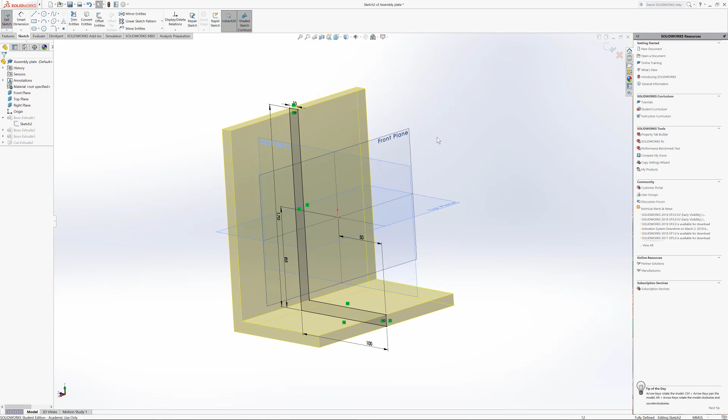So as you can see, we already loaded into SolidWorks. Just to give an idea of my sketch, I made this L shape and extruded it. So it's 10, that length, that's 100, that's 170, and then it sits halfway to the origin, 85, and the same with the other side, 50. That's just to give an idea of how the plate I'm using was drawn.

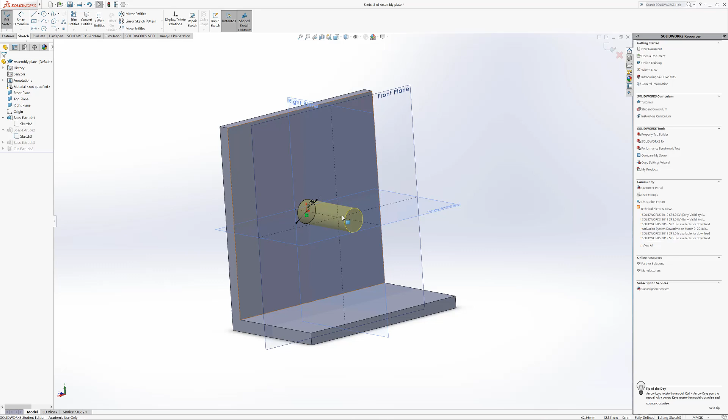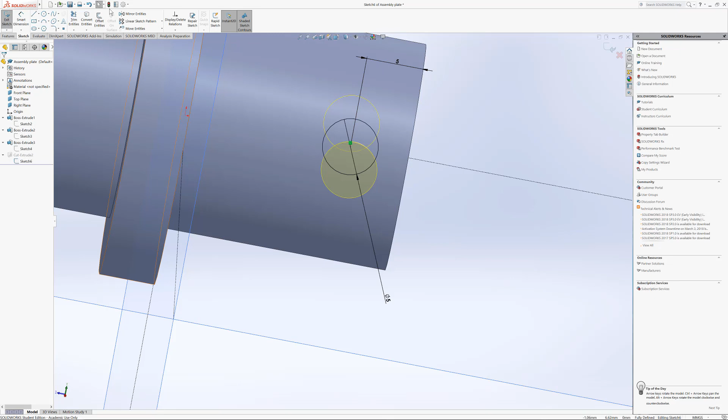I'll also show you this. If you want to try it, this one is just 20 and then extrusion back. These are pre-drawn, my plate. Same with this one, it's just a 30 diameter and then extrusion back. You can pause the screen as I go on. And then this one is 5 diameter and then 5 from the edge. So basically, that's the plate I've drawn.

You can pause on each individual section and create the plate yourself. I just want to give you an idea of how to do assembly.

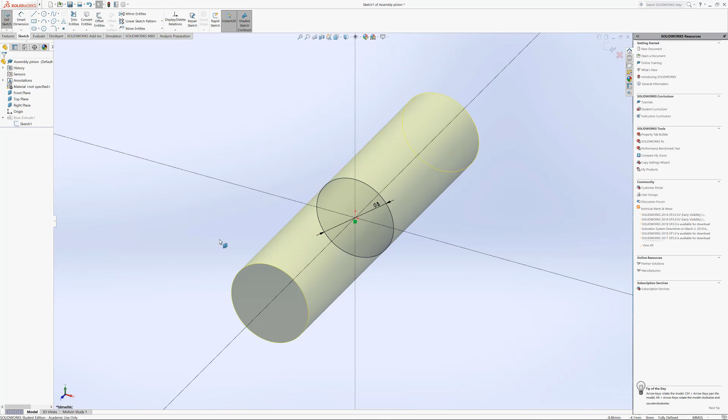I also have a different component, a pinion that fits into that small little hole. Basically my pinion, just to give an idea, it's a 5 diameter hole and I extruded it. Not sure, I think I extruded it 21 millimeters.

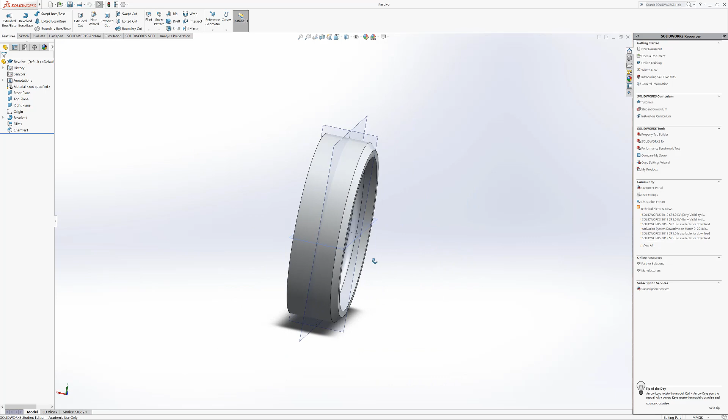And then the revolve looks like a wheel almost. This one you know from my previous tutorial, I've shown you step by step how to do a revolve and how to draw this one. So just go back to the video that says revolve.

So basically to start off an assembly, you click here on top saying new, go to assembly, click on assembly, and say okay.

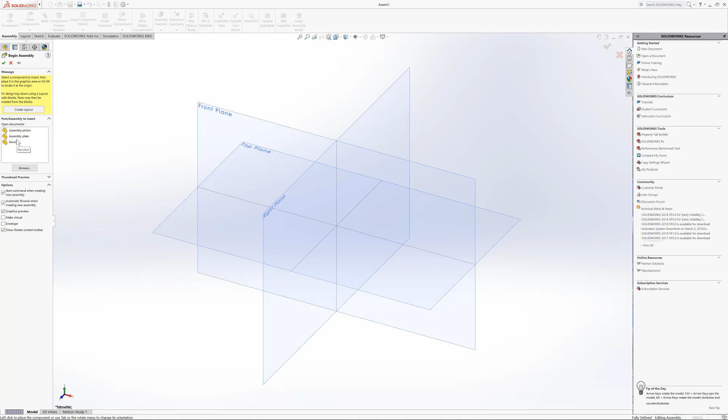Obviously now there's no need to view your planes as yet, but you can just view your planes. And as you can see, because all the other drawings are open, it automatically puts them here under open documents. Depending on if you don't want to use certain ones, you can close them and they'll disappear here, or you can open ones and they'll be added here.

Basically, let's just insert a component, the plate. There's my plate. Your plate initially might look something like this, so you just rotate it to make sure you can see everything and place it there.

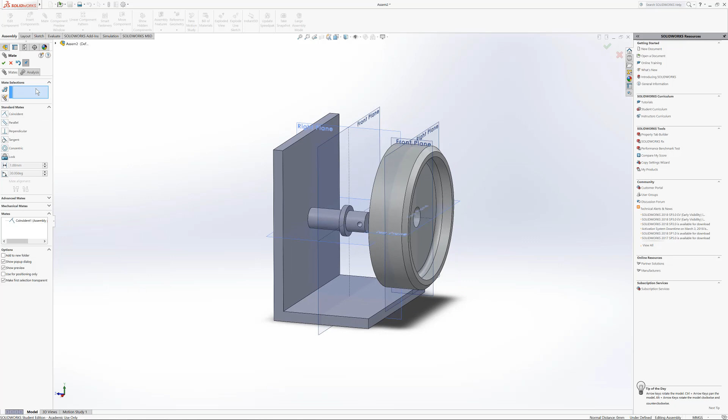Now I start inserting my other plates, or my other components. So let's insert another component, now we want to insert the revolve we made. You can't rotate now because it's going to rotate the whole screen, so for the revolve just place it anywhere. Please don't place it on the plate, it just makes it much more difficult to see what you're mating with what. Let's view our planes.

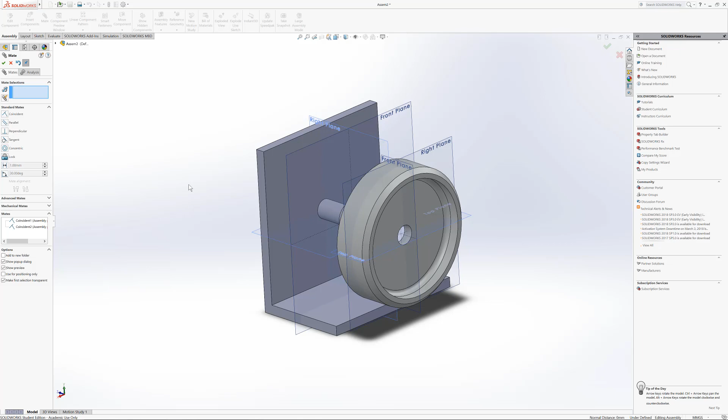This just makes it easier, because like I said, I use my planes as mating functions. So let's take this plane here, we go here on top and say mate, to position two components relative to one another. Let's say we want to mate the front plane to the right plane. Can you see what it does? It automatically snaps it into position.

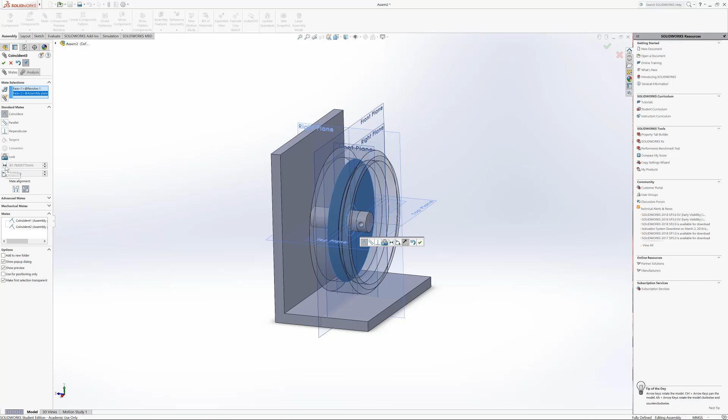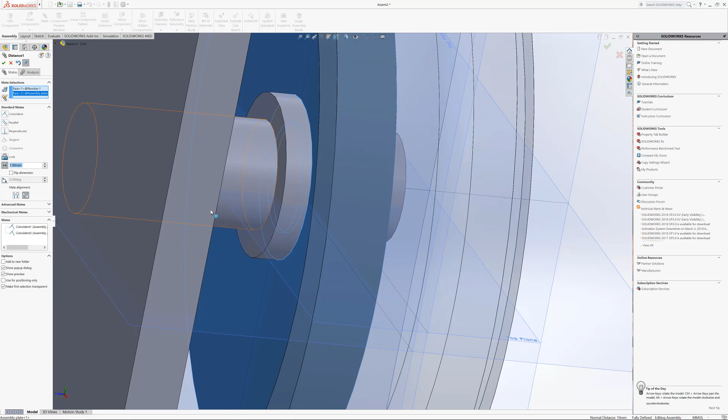And then we just say yes, I want to do it that way, and make sure this edge is on the outer side. So let's add another mating function. Now we say, let's mate that plane, the top plane, with this top plane, so it's on the same height since it's going in there. We say yes, and obviously most of the time in assembly, it needs 3 mate selections before it sits exactly where you want.

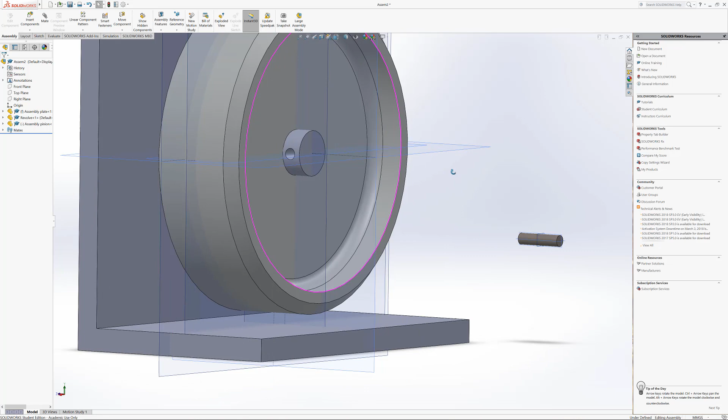So most of the time would be 3. Some applications, which is very rare, would be 2. Okay, and obviously now we want to let this hole sit in there. So what we can do is I can select now this surface here at the back, and I can say it needs to sit there, and then you can see it snaps to it.

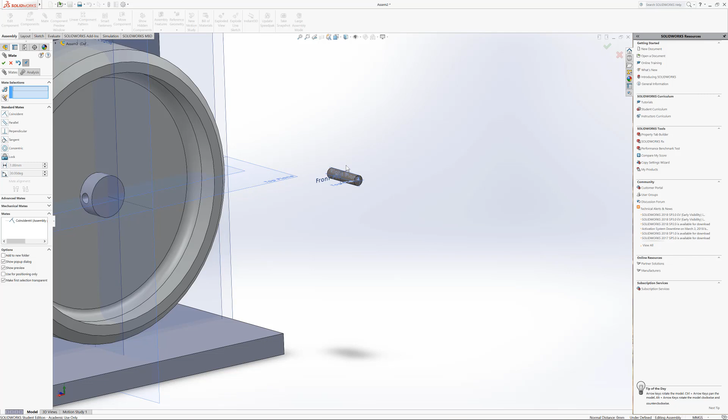But now what I can do is I can say I want it to sit at a certain distance. So I just go here, say a certain distance. Let's make it sit 1. Okay, let's just first give an idea what it does. Let's say 10. So as you can see now, this surface to this blue surface is 10 millimeters apart, that section. So if we change this to maybe 1, you see it comes closer to this component. Okay, so let's just leave it at 1. We just say yes, okay.

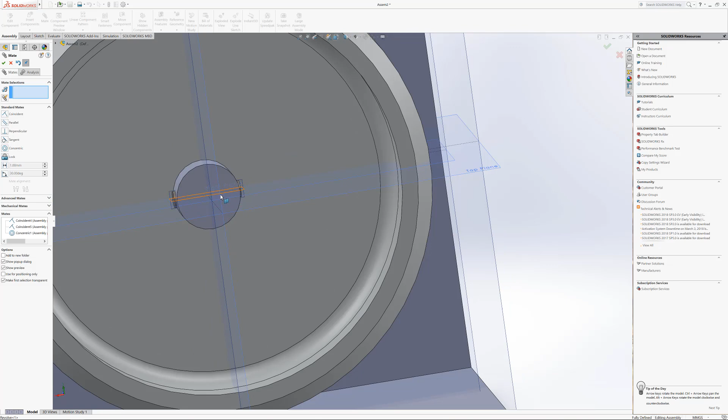And now we want to insert that little pinion in this little hole. So now we just say insert another component, assembly pinion, just drop it anywhere. And now again, we want to assemble it in that little hole. So as you can see, that plane sits also in the middle of that hole. Okay, so you can say top plane, let's just say mate, top plane to this top plane, snaps to that top plane.

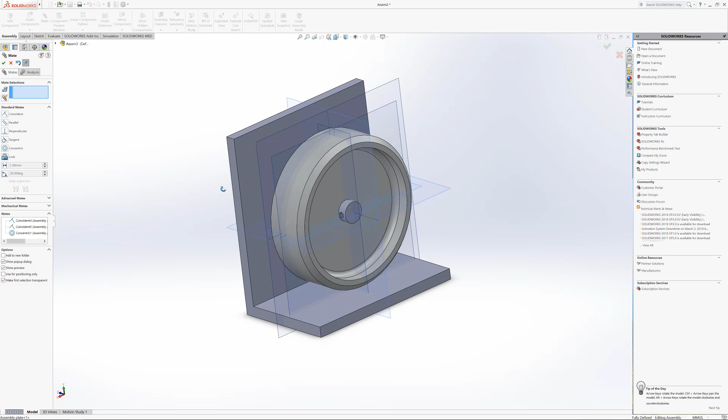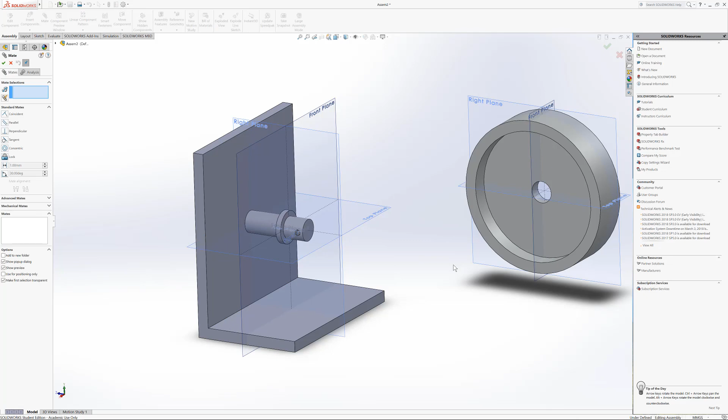We can also say this plane here in the middle should be equal to this plane. Okay, and then it snaps to that. Can you see now? It's in the right direction, it just needs to go in there now. So this is very easy. You just click on your surface, you click on the inside, and it snaps it to it. And you just say yes. Now you can actually see that it's sticking on both sides. So basically, it's just the locking pin. It's just locking it into place, to make sure that this wheel doesn't come off while it's being used.

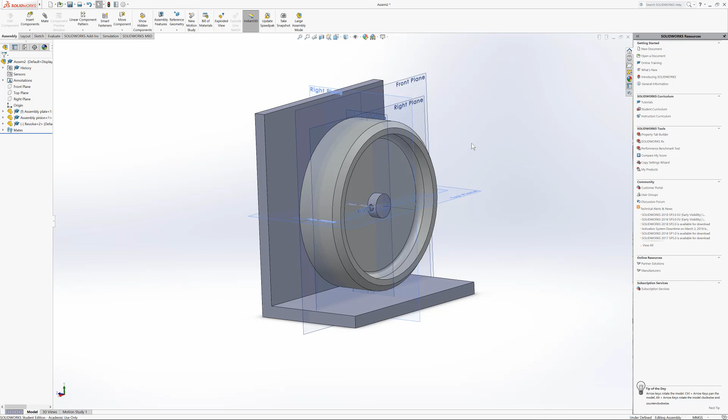So basically, this plate, like I've said, I just designed it quickly just to give an idea of how to do assemblies. So most of the time, I use my planes as mating functions, but there's also different methods of doing it. For instance, you can do distance mates, you can do parallel, perpendicular, tangent, coincident, concentric, all those type of things. So this is not the only method of doing it.

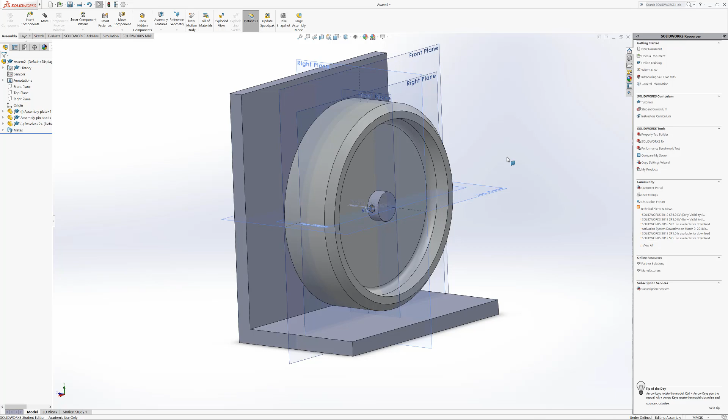If I can give you an idea, let's just maybe delete. Say we delete the revolve. Yes. Okay. Let's say we want to add it again, let's see if we can use a different method of adding it. So what you can do is you can actually say, for instance, let's make this equal to that, so it snaps to it, and you can see that the edge is still on that side, so you just say yes, but now it's sitting in the wrong place.

So now we want to make sure that this back side is equal to this front side again, so we just say that should initially equal that, and now it moves forward. Can you see that? It slipped all the way forward now. So as you can see now, it snapped to the back of that. So if you want to change it, just click on the one that you did and you say view mates, click on that one, you say edit feature, and then we just say flip direction.

If you flip it the other way, it's going to do it the other way. Can you see now? Now it's here, it's going 20 back, and if you say flip, it's flipping it the other way around. Okay, so now you can see from there to there should be 20. So let's just make it 1 like the previous one, so it's very close to it. Not 13, 1, and we just say yes, we confirm it.